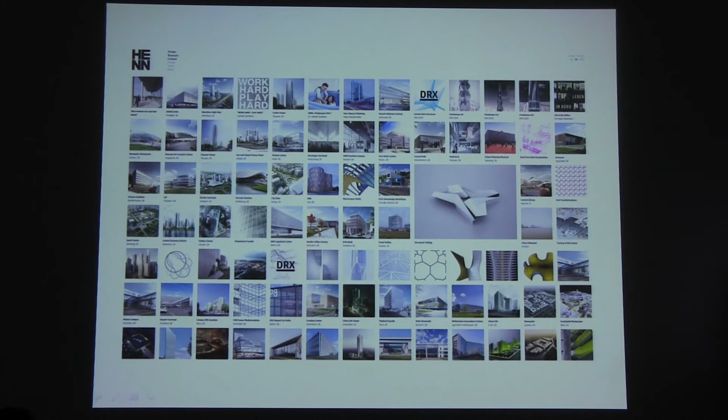I would like to illustrate and talk about that dynamic at the hand of three projects, very different in scale and in type. First one is the Porsche Pavilion. Second one is an innovation center for Merck in Darmstadt, not too far away from here. And the last project is the Haikou Tower in China.

I would like to start with Porsche and the building typology of a pavilion, which in itself is something in between a building and an experiment. It's something that is usually temporary. This one was supposed to last longer, but a great vehicle to test things that you usually don't get built.

The context in this case was the brand. Everyone knows Porsche. If you're somehow interested in cars, or if you're obsessed with design, then the 911 is kind of like the incarnation of your desire. And when we were commissioned to do this pavilion, we really examined and tried to understand what the core of that brand is.

In the brief, we were confronted with these kind of clouds of words that would mean something, but in the end also don't mean anything. You have these contrastive pairs of tradition and innovation, exclusivity, social acceptance, performance, design, functionality. It all means everything and nothing at the same time.

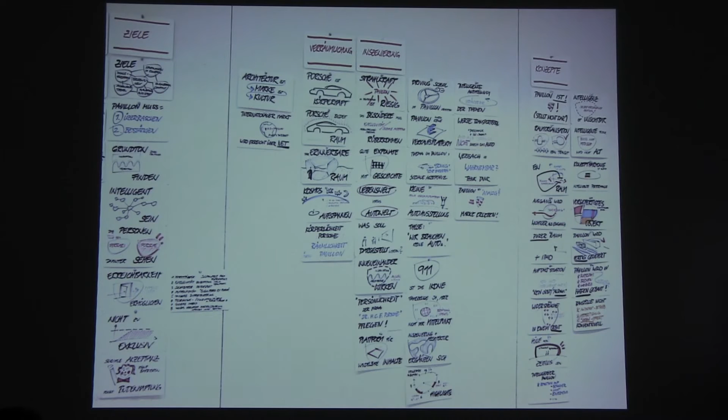They basically, in a one-to-one interview or conversation with someone else, visualize and extract the information and then put them together. So each bit of information is on one of these cards, and they map those cards out and try to filter out the main messages that we then try to translate into more abstract terms in order to inform the design process.

So in this case, we collaged images and references together from architecture, from the art world, to visualize and get an understanding of these terms.

So the first one was the idea of structure and body, where Porsche as the chassis is something that is surface-based. It's not something that has a surface and then something that holds it up, but it works like a body. The idea of light, that the pavilion should somehow negotiate between the daylight, and on the inside there was supposed to be media presentation, so it's basically like a dark room.

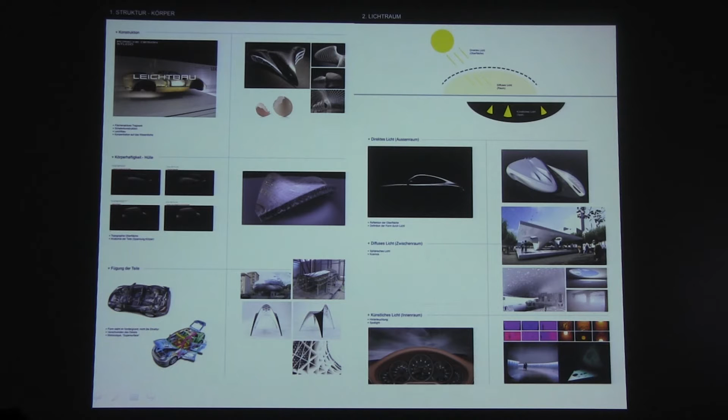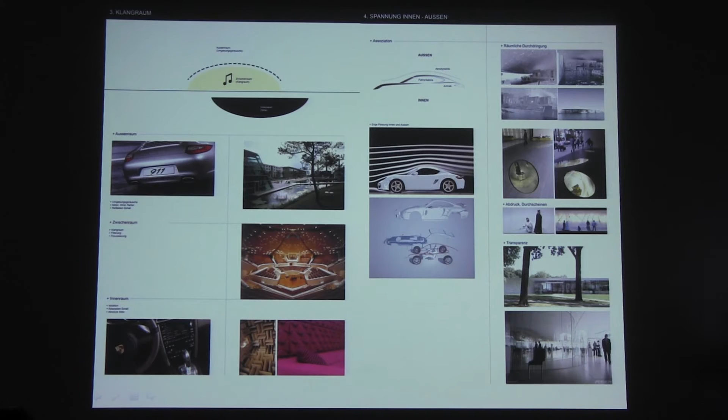So how do you deal with that? The idea of sound, the threshold or the tension between inside and outside. These were all, you could call them mood boards as well - maybe first attempts to understand how to translate what we first saw as these kind of brand words into something that could help us develop a design from it.

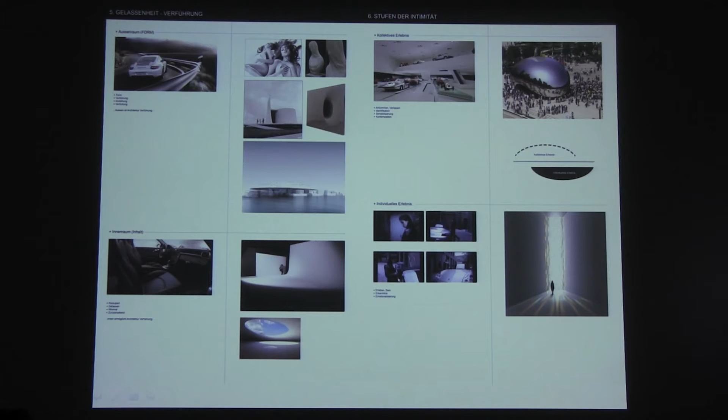Here this idea of seduction, also that you want to somehow attract people. The idea or question of intimacy - should it be a collective experience, or do you want to be on your own when you experience this car?

The location is in Wolfsburg, in the Volkswagen Autostadt, and the site was right next to the water. So there was also the idea to maybe integrate that somehow.

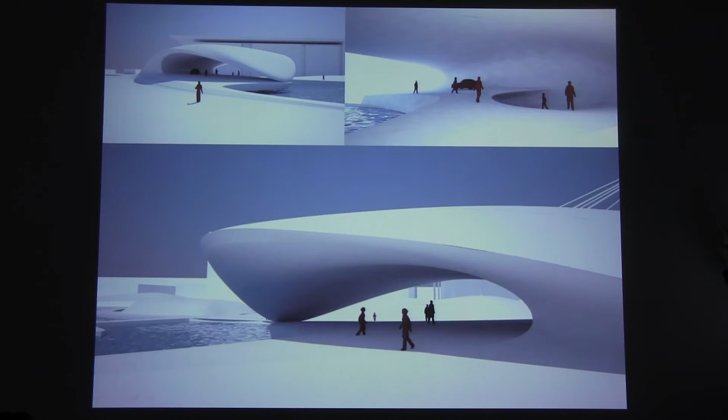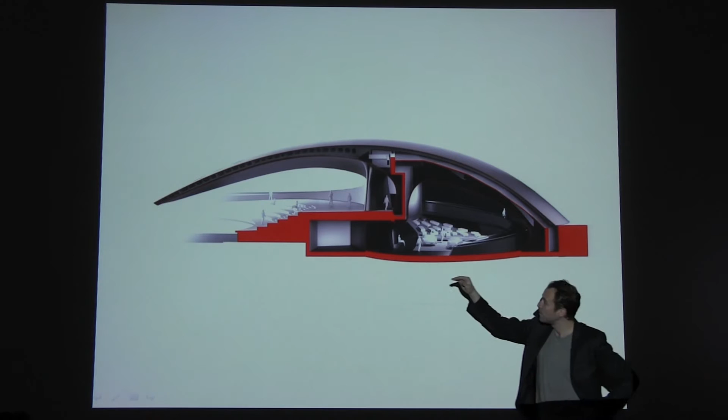We started to play with this idea of exterior space becoming interior space. You can see kind of like an opening or a hint of an opening on the top right. The idea was that the actual exhibition space could be basically buried in the ground, and that this kind of in-between space would then lead you almost in this processional way up to that moment.

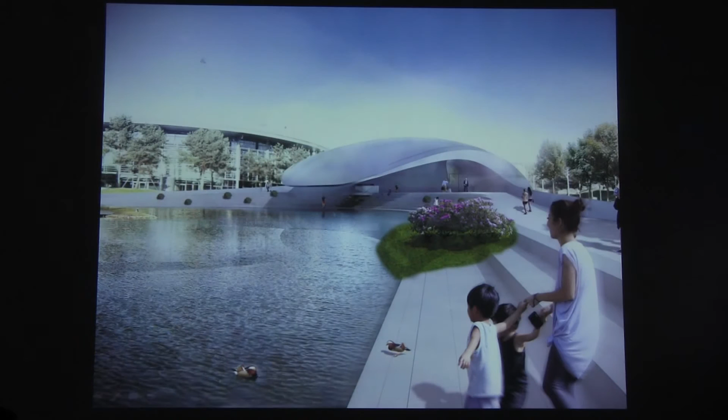And then here, the first or more concrete images of what we imagined this thing to look like.

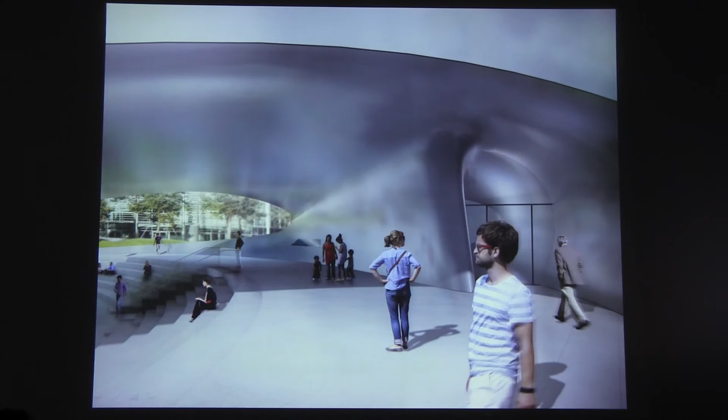And that was all good. So we were kind of happy, Porsche was happy, the brand dudes were all applauding, Mr. Müller, the CEO, liked it. Also all the Porsche designers who we went back and forth with, they were actually quite amazing. We learned so much about curves from them, as I've never learned from anyone else, like how to accelerate and decelerate a proper curve. Any Maya seminar at Columbia was just bullshit compared to that.

So that was kind of like the image that was out there. But the problem was now we had absolutely no idea of how to build it.

So we said, okay, let's reverse the game, and we launched a competition amongst some structural engineers, some quite well-known ones: Arup, Buro Happold, Sobek, Knippers, and others.

And they all came in and presented to us different ways of basically formalizing this now as a structure, and also of formalizing it in terms of material. So there was the whole range from a concrete structure to a grid shell, a wood shell, then here kind of a steel structure.

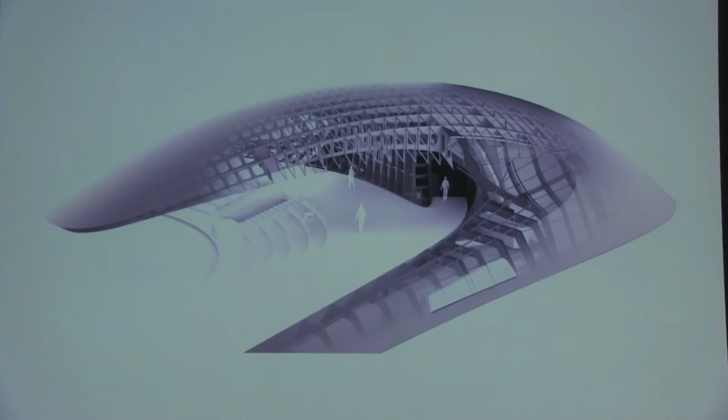But anyways, the choice was made, so he was our man, and we then started thinking of other ways of doing it, and we came across a company that usually builds ships. It's called Centraalstaal, and they have done big sculptures with people like Anish Kapoor. One of our colleagues had already worked with them on another project in Abu Dhabi.

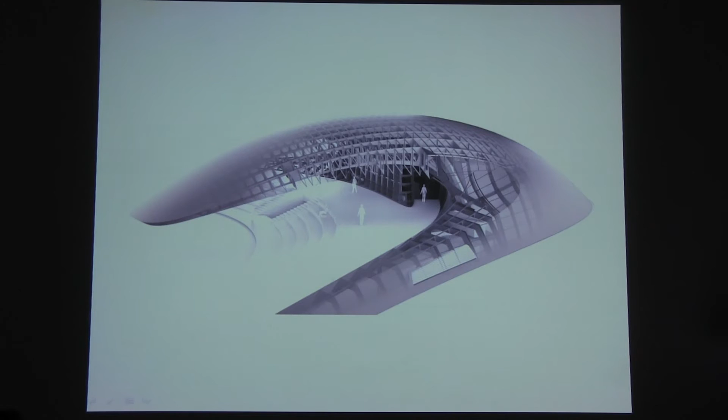We started approaching them, and they said, absolutely no problem, we can do this for you. So we decided to go for this option, and we decided to do a monocoque structure, which was very interesting or intriguing for us, because it combined the spatial enclosure with the structure. So basically what you can see here, the ribs and the surface that encloses it is one force-active whole.

And they proposed: okay, we can build this in sections in our shipyard in Stralsund, and then basically ship it to your site and assemble it, and that's the end of the story.

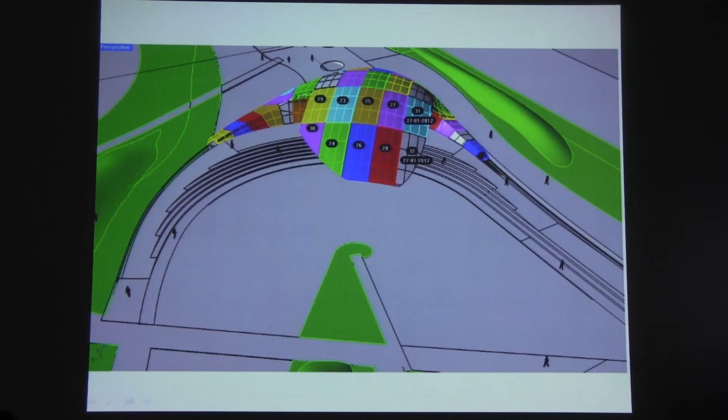Maybe I have to mention that what was kind of difficult is that the construction, we only had one year from the design to the realization of the building to the opening date. And the Autostadt was in full action, so the construction site could only happen at night. The main part was basically over winter, so you can imagine the poor construction workers working their nights at crazy temperatures with, I don't know, super high speed.

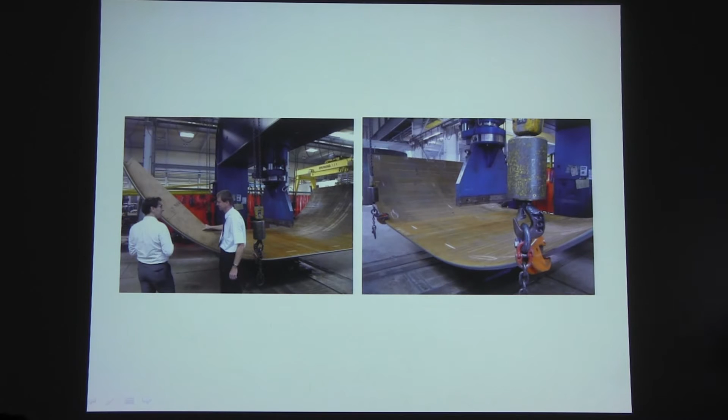Good, so this is the factory where you can see the big sheets of, it was actually stainless steel, and these big tools which basically pressed those sheets into shape.

We built mock-ups in the first place to take the Porsche people there and make sure that the finish of the surface was going to be good enough.

And it was quite amazing. I mean, these surfaces are double curved, and they only had a tolerance of, I think, 2 millimeters over these pieces that were the size of what you could still put on a truck.

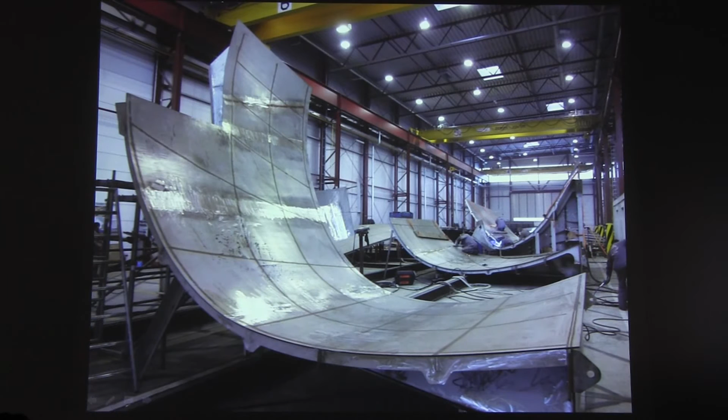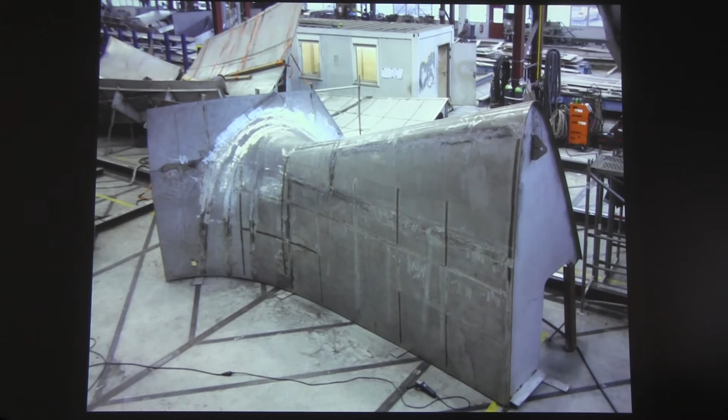And then, after a while, we took over that shipyard, and here you can see this army of pieces and sections that they all welded together. Some of the pieces were kind of easier to make. Others, where the curvature was more extreme, were incredibly difficult, and they had to sometimes redo them multiple times in order to get it right.

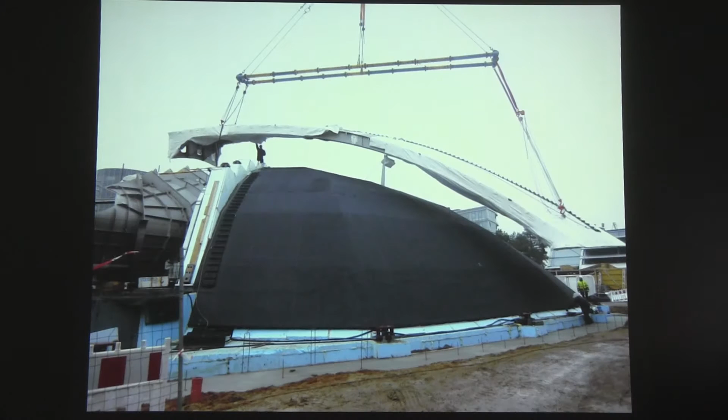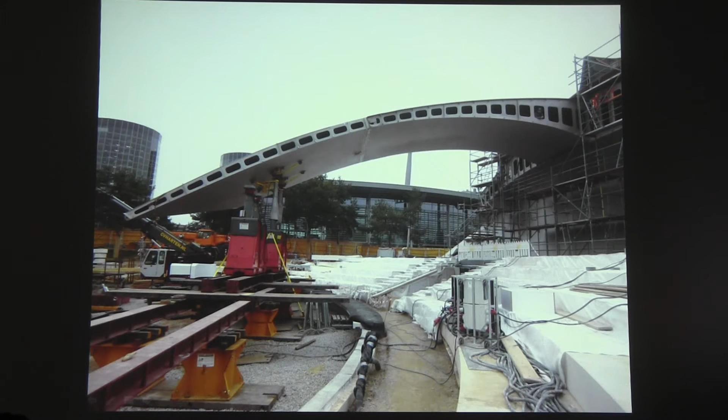So here you see the assembly then on site. This is one of the sections. This black thing underneath is basically the already insulated concrete shell that houses the interior. And here were the first pieces that were attached, the first cantilevering pieces that were attached to the main body.

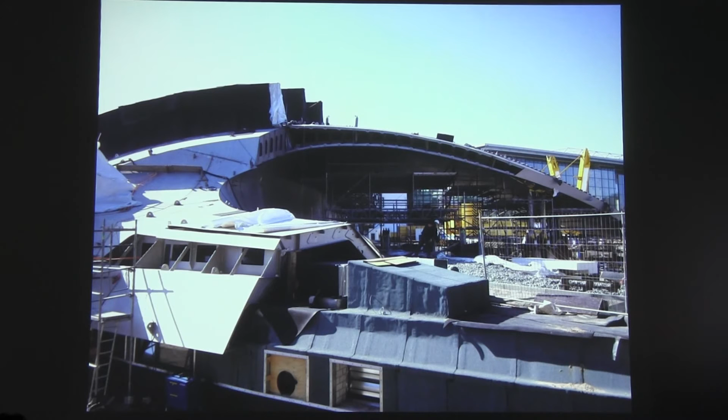And you have to imagine that when a new section was brought into place, they had to basically weld it from the outside and from the inside. These in-between spaces, over there they were still quite large, but in the front part they were really narrow. So they had to fly in these climber guys from Austria, welding specialists who would make their way all the way into that tip to close it off from the inside. Thank God everything went well and they didn't burn themselves.

And these are images of the finished structure, which was the very first building that I ever did and finished in my whole life. The biggest surprise was to see something in real scale that you usually only have on your computer. That moment when you see your first building realized is so amazing, because you're overwhelmed by the fact that it's really there. In this case, I was quite amazed that it really looked like the 3D model. It was one-to-one, the same thing.

And what was interesting was to see how the material kind of behaved and came across and appeared. It was basically stainless steel, and then they brushed it with stainless steel little balls. That's what they threw at it after they welded all the pieces together.

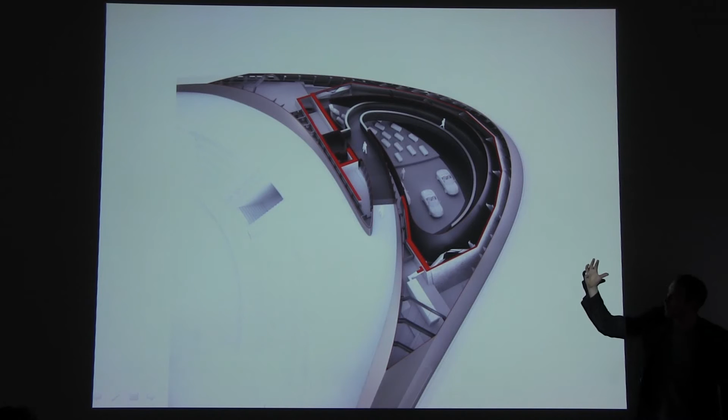This is the entrance to the exhibition space, and here you can basically see how it works. You walk in through that bridge, which then spirals down and takes you out again. It's organized in a loop. On the inside you see this swarm of cars dropping down from the ceiling, telling the story from their oldest model to the latest one, the whole design evolution of the 911. That's a shot of the interior.

Initially we tried to do a pavilion without a car, but in the end they won. They said we have to have a car there because people want to sit in that stupid thing. So there was no way around it. And these are photographs from the outside.

The second project is very different in kind and also in terms of its context. It's for the oldest pharmaceutical company in the world, Merck. In 2018, I think they're celebrating their 350th birthday. And they have their main production site—I wouldn't necessarily call it headquarters—in Darmstadt, not too far away from here. This is where they have their chemistry and also their pharmaceutical production and brand.

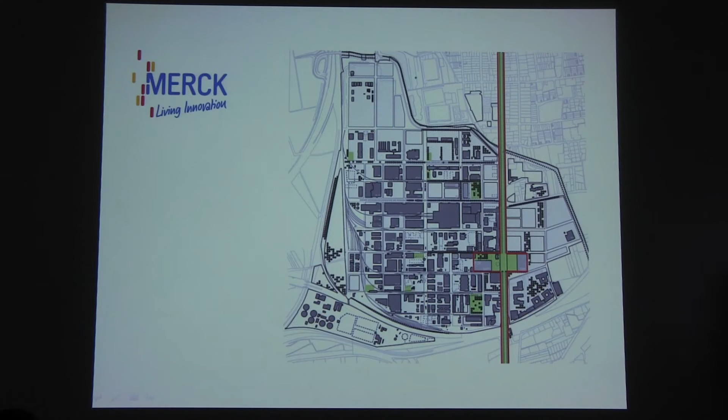They decided, no, we want to have a building for our people to collaborate and to innovate across the disciplines. Their biggest problem is that they have so many people, but they have no idea what the other field or branch is doing. So they wanted a building where they can come together in smaller project groups and sort of infiltrate and infect each other.

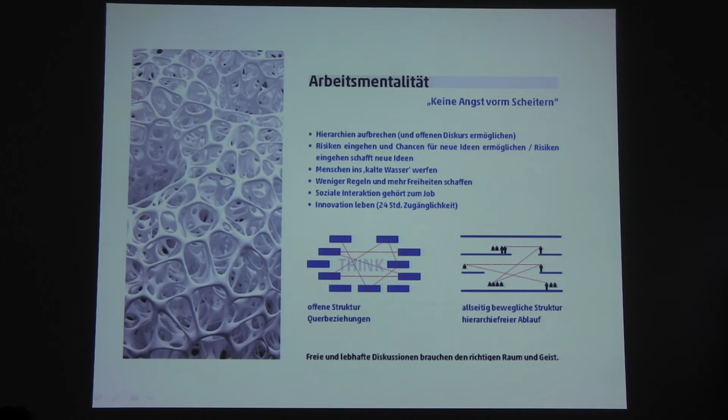Again, here we had our programming team work very close with the client and with the users, and they basically filtered out these main statements: that they wanted to collaborate, they wanted to be physically connected across the disciplines. Communication was one of the buzzwords that kept reoccurring, but also a place that would somehow suggest that it's okay to make mistakes, to fail. So something that is the opposite of a corporate headquarters, more something where you can experiment, where you feel somehow triggered and engaged.

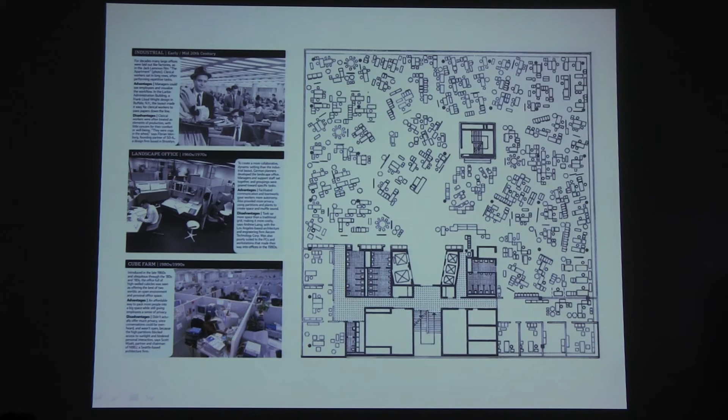Work was passed on. In the 1960s and 70s, the so-called Bürolandschaft was invented. This is actually a drawing of a building by my grandfather, the Osram headquarters in Munich. He was the one to first introduce the Bürolandschaft in Germany. It looks kind of as if he was tripping on some kind of drug, but it was actually quite innovative for that time.

This is an interior shot of the office. The building still exists in Munich, it's now listed. This kind of went on then to the cubicles, where you wanted to combine this openness with a sense of privacy.

In the 2000s, companies like Google and others brought in the whole fun factor, this idea that it has to be more fun to be at work than to be at home with your family or with your friends, which psychologically and also socially I find very, very difficult.

And then, most recently, the trend towards this kind of collaborative approach. Even though there's a long history of office buildings in our own office, we basically invited people to talk about this whole issue.

This is something we have called the Henn Academy, where we bring in people from the outside to talk about certain topics, in this case officing. It was a series of lectures that was quite enlightening, I would say, for us.

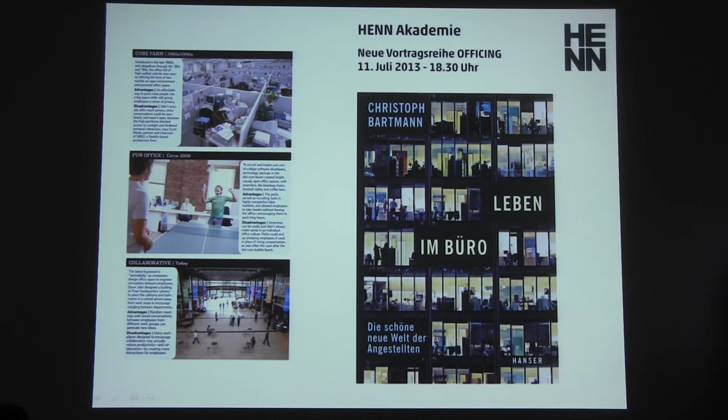The first one was by Christoph Bartmann. He's running the Goethe Institute in New York, about the life in the office. Quite an ironic take on all these kind of motivation tricks that you have these days.

But then also clients of ours talking from their perspective, what are the needs and the requirements of their people. This is Hypo and BMW.

And we invited Carmen Losmann, a filmmaker, the movie Work Hard, Play Hard. I don't know if you've seen that. It's quite shocking, I have to say.

And Professor Nassehi was in the office about two weeks ago to talk about what we're actually doing after work. And the question is, work these days, is it ever over? No?

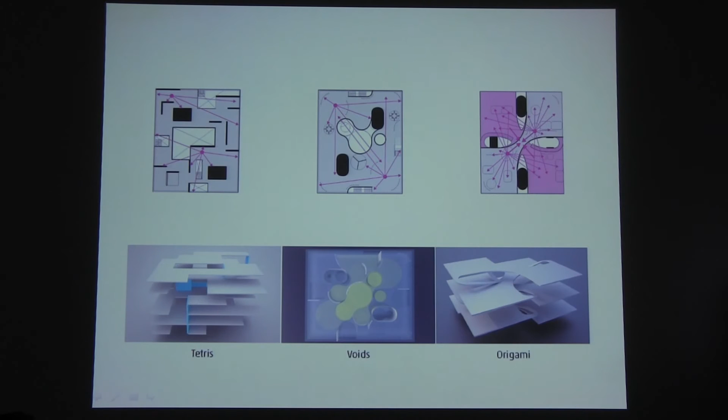This was a very early study model that still serves for us as the main idea of that building, which is currently in the planning.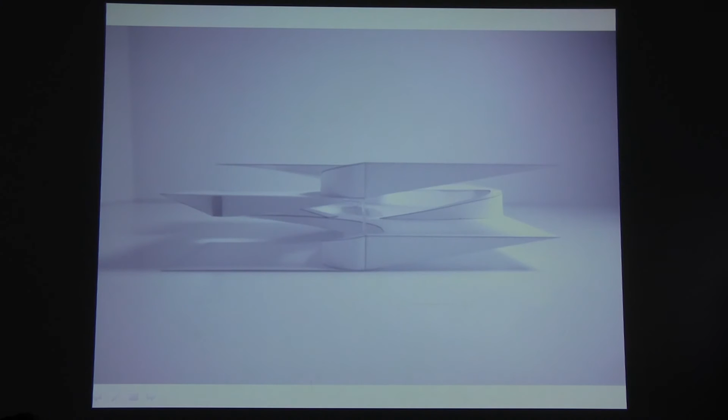You basically have, it's geometrically very simple. You always have these two project platforms that are connected by a bridge, and then they just kind of rotate, and they're connected through these ramps or through these staircases.

What was nice about this structure is that this was also an input from our programming team, who said we have this gradient of program requirements. Some of the programs had to be more private, and some had to be more open and public. I think this is something we learned, that you don't want to communicate all the time, but sometimes you want to sit down, focus and concentrate.

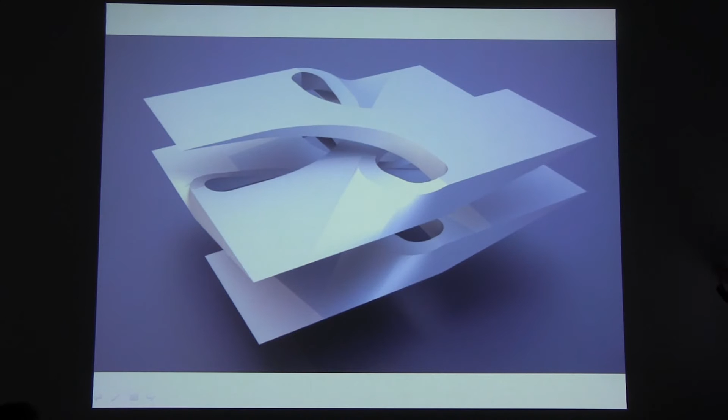So these kind of bone-like things almost. Now at the very end, you were most private, and then there was this gradient, or this climax in the center where things were most public.

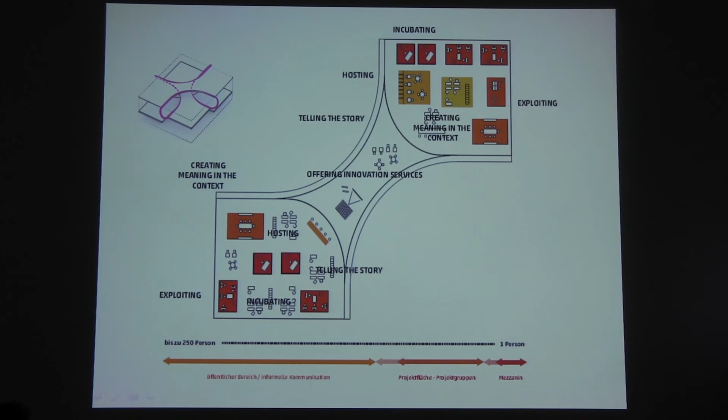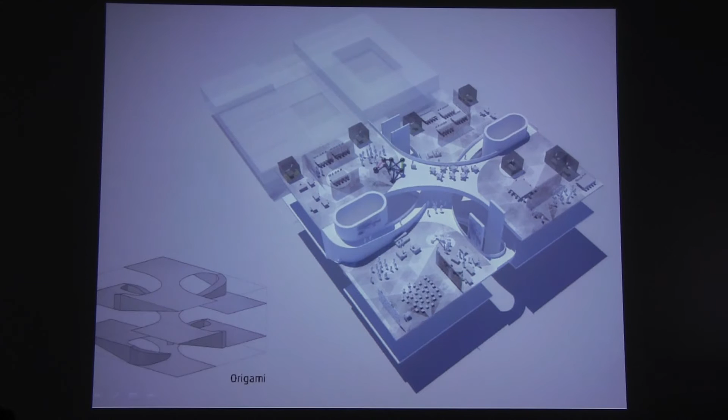This is a series of programs that we had to place along this floor plate. Towards the center is where all the communication spaces and presentation areas happen, and towards the periphery you have smaller tables and work groups where people can concentrate and hide away.

These are first renderings. We're basically standing in the very corner. It's always like a double height space, and we're overlooking a project space in front of us, then the bridge that connects over to the other side. Up here is basically two more project spaces that are connected again via that bridge.

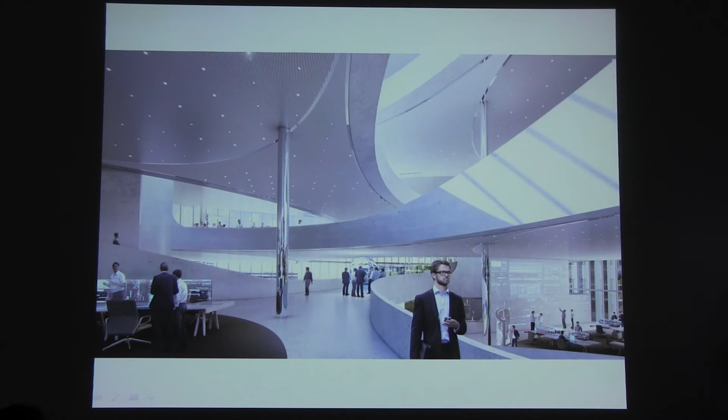In the beginning we were a little bit scared that the client, Merck, would be shocked, but they really loved this concept, and I think bought into this idea that it's a very multi-layered space that could come into being here.

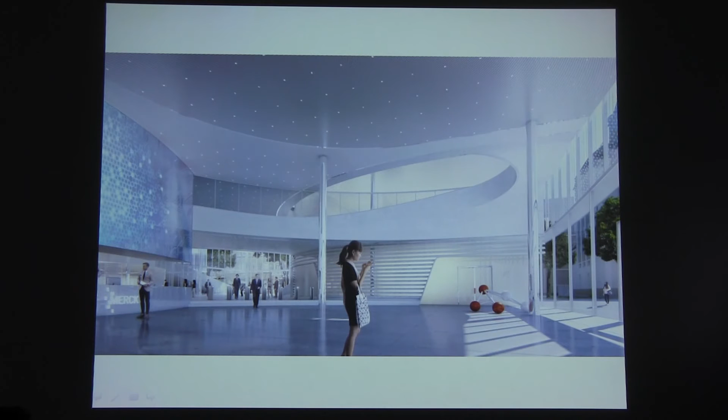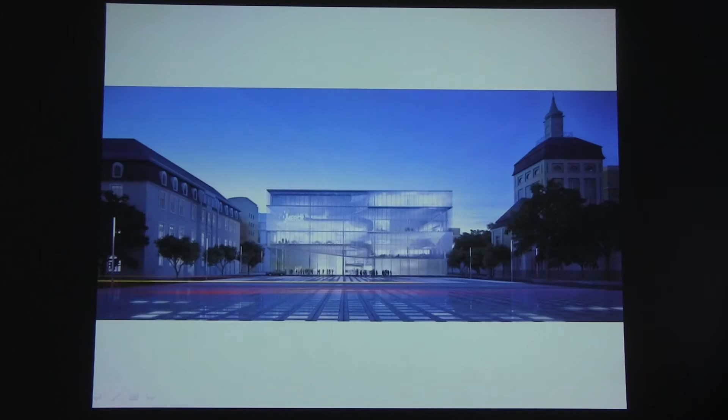This would be the entrance at the bottom, where when you walk into the building, you have this kind of awareness - you cannot see what's happening, but you can somehow sense and feel that something is going on. This is a view from the outside, from Frankfurter Straße.

Good, let's go to China - the Haikou Tower.

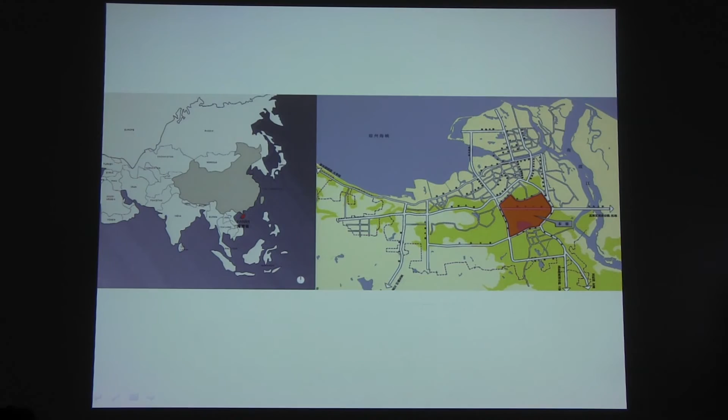Here you can see the site. The client was Hainan Airlines, and this was the former airport - this is the former runway you can see here. They basically turned the airport into the new CBD, and Hainan Airlines owns pretty much all of it.

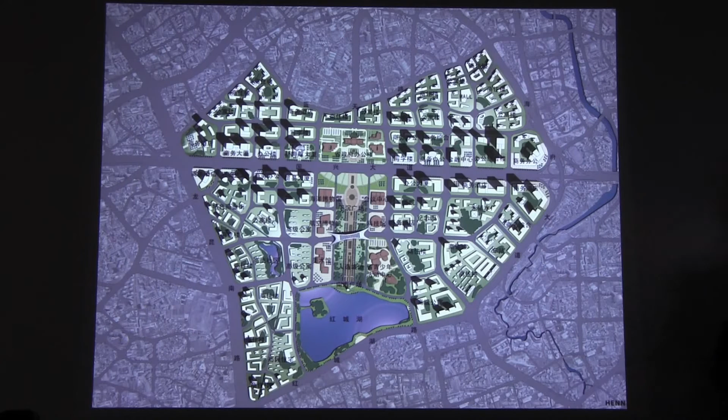This is what it looks like when we went there to see the site. Like many times in many cases, there's absolutely no context. The only building that was there already was their headquarters - this beautiful structure that you can see here.

We went to see them and were a little surprised, so we asked what's up with them, and we found out that they have a big boss in China - you always have a big boss - who is a big Buddhist. Buddhism was also something very present and important for the local culture there. This is a statue at the very south of the island.

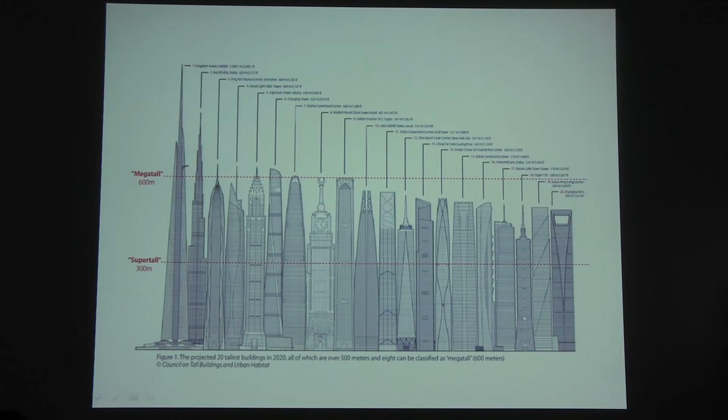In any case, we started to focus on the challenge of doing a 450-meter high tower, and we started looking into what is out there. 450 meters technically is something between super tall and mega tall, so that sounded really interesting.

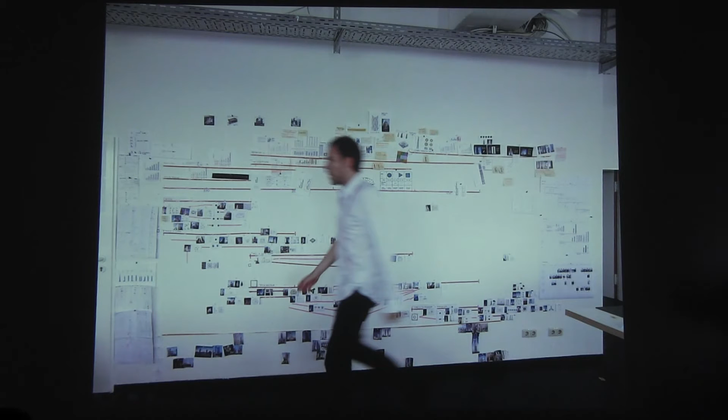What we basically tried to do is put together a matrix of existing buildings, and we tried to study them according to their structure, their program relationships, and in terms of their circulation, and tried to make sense out of all of that for us. This here is a diagram where you can see different structural systems according to different heights. You can see everything below 200-300 meters is kind of an easy undertaking - above 300 is where it starts to get tricky.

That little thing up there is where the wind also starts to play a big role. So it's not just about the vertical loads, but mainly the horizontal loads that start to become the problem.

And we studied that in relation to other systems that you can find in a skyscraper. Circulation, the core, being also quite an important one - it takes up more than 50% of the area. And also the way different programs were organized. Usually a tower is not just a single or mono use, but you usually have offices combined with residential, or hotel, or commercial facilities.

So in this diagram, we are basically relating - you can also see the little icons for the circulation system, so the central core versus split core versus eccentric core, and then in relation to the different structural systems, form outrigger versus perimeter structure.

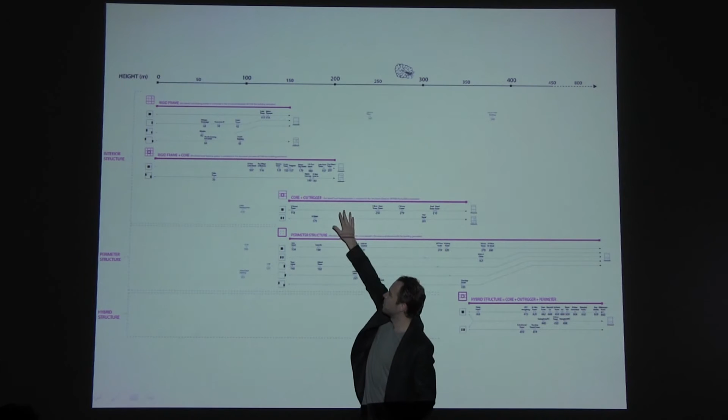And we started to read patterns now in those structures in relation to circulation systems and program arrangements. And that helped us a lot to understand how these machines - you can almost call them machines because everything is optimized and maxed out - how they would work and how they would operate, and how we could then use that creatively or actively to come up with a design on our end.

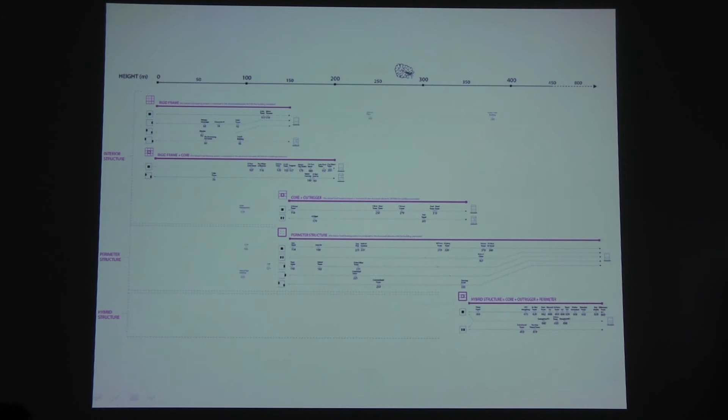With our first ideas, we then went to the London office of Arup and had a workshop. And that was almost like the most important day, I would say, in the whole competition. Because we were just sitting around a table, and the amazing thing there is that you just have people walking by. So there is the elevator guy, and then there comes the MEP guy, and then there comes the structural guy. This was the moment where the economics guy walked in, and he said, 'Okay guys, just tell me what are the two programs that you have.'

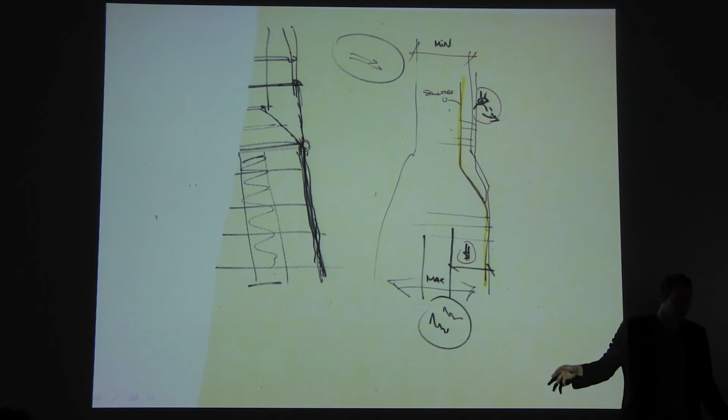And we said we have a hotel at the top, and we have offices at the bottom. And he said, 'Okay, that's easy. You have to max out your square meters because you can rent them.' And at the top where you have the hotel, it's all about the views. So you don't want to have any kind of structure in front of your face.

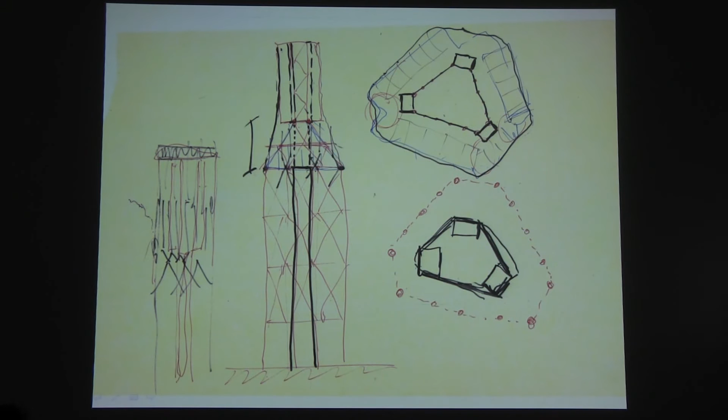And even though it was just like a sketch, or a very early moment, all of these different opinions kind of coincided and almost became the key diagram of the final tower. So you can see here on the left the office chunk at the bottom, hotel at the top.

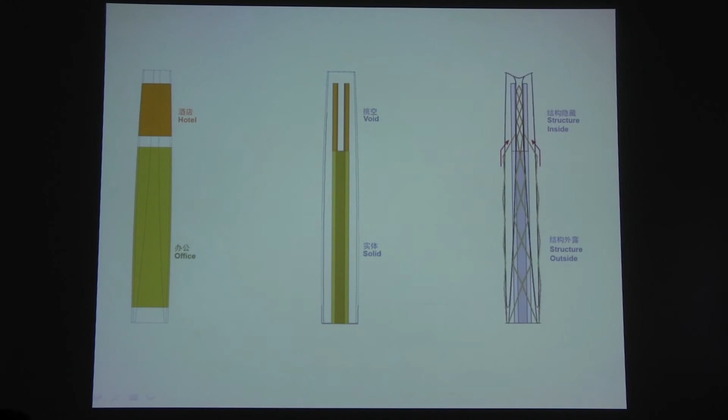So we decided to do for the lower part a solid core, which then at the top split into two and created a central atrium or a central void. And the secondary structure, this kind of diagrid, would, at the moment where the program flipped from office to the hotel, basically fold inwards, so that it would become experienceable from the hotel void, but that you would have free views to the outside.

The vertical forces were - so this is kind of like a simple diagram of how the form was generated. It's kind of like a square, and then as you should try to taper towards the tip for aerodynamic reasons, we basically pushed in the four corners and then had a series of 8 mega columns run along these describing curves now of the tower.

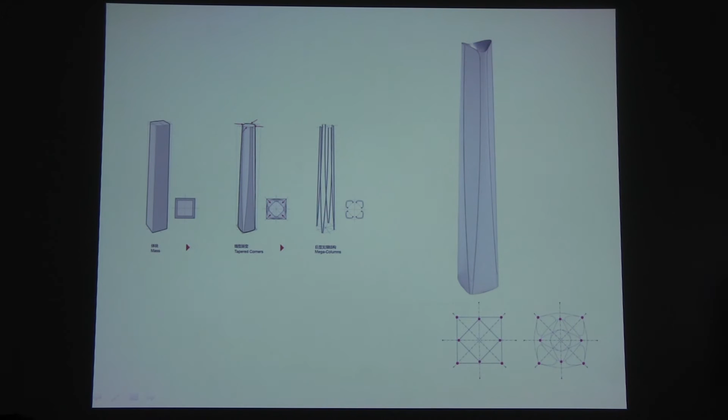And what was interesting then when we played around with this - it was still like a simple, very conceptual Rhino model - and we turned it into the top view, one of our colleagues from China started to smile and he said, 'It looks like a lotus flower.'

And we said, 'Yeah, that's right, that's true.' And I said, 'That's awesome, we have our story all set.' So from that moment on, the tower was called the Lotus Tower.

I'm kind of joking, but in China, this is almost like 50% of it - you can do a really intelligent tower, but no one's going to buy it if you don't have a story to sell it. And it's probably like with you, when you present to Johann at the end of the year, you somehow have to seduce him and build up some kind of a climax.

So this was the tower as it kind of came out.

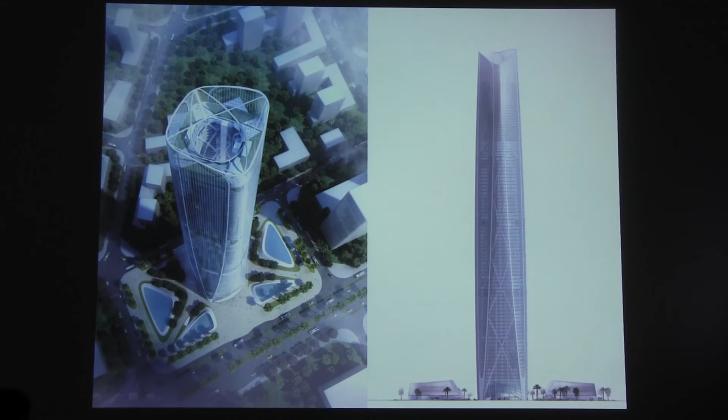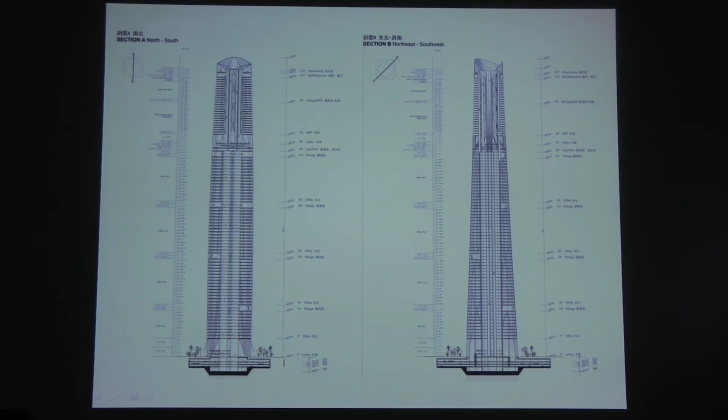In China, you always have to be on time, so they always come in between 8:45 and 9. So the biggest challenge is to dissect these flows of people and lead them to the right elevators. You have this on 3 or 4 levels where you try to take those flows apart and bring the people to their specific elevators.

As you see down here, the tower basically sits on those 8 mega columns that come together in the corners, and also the big diagrid that then hits those corners. So this is basically completely column-free. I think the distance is 55 meters, completely column-free space.

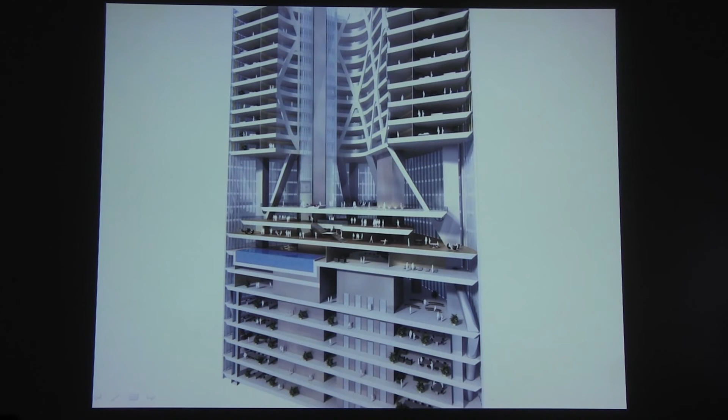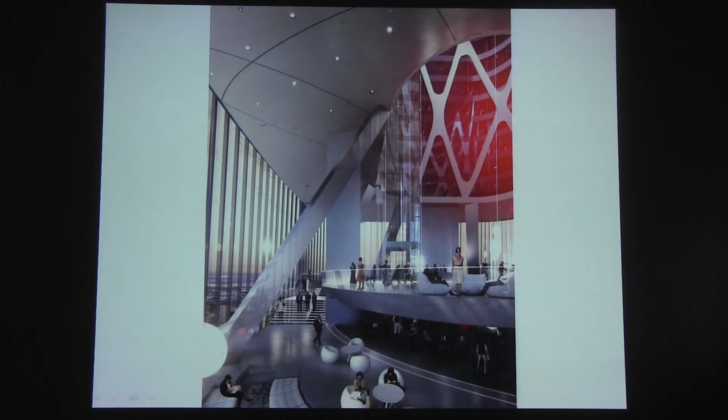Here you can see that the central core then becomes a central void, and this is at the very tip. Also something that we try to do: usually you have MEP sitting on top of a tower, so we try to keep that all open so that natural daylight could fall into that void.

So we submitted this competition, and that's also something in China that is usually very different from here. In Europe, you have a proper jury and you get a proper report. Over there, everything is kind of mysterious. You don't hear for a long time, and then they come back with some kind of news.

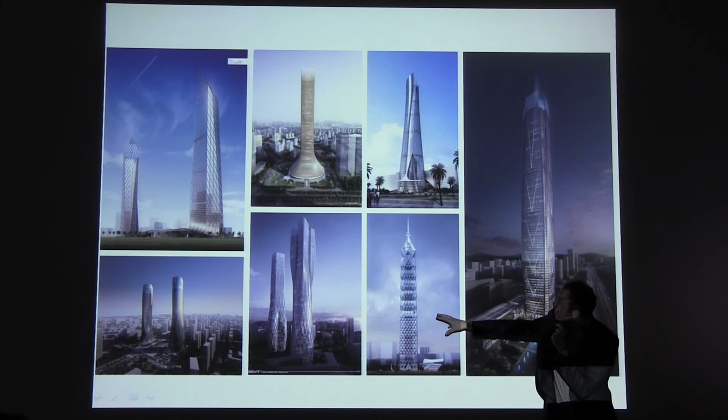These were the other competitors, by the way, or some of them. This was Wilkinson Eyre, Zaha, and RJ and some others. They basically shortlisted, after a public voting which I think was probably faked, these guys - Wilkinson Eyre and us - to go into the second round of the competition.

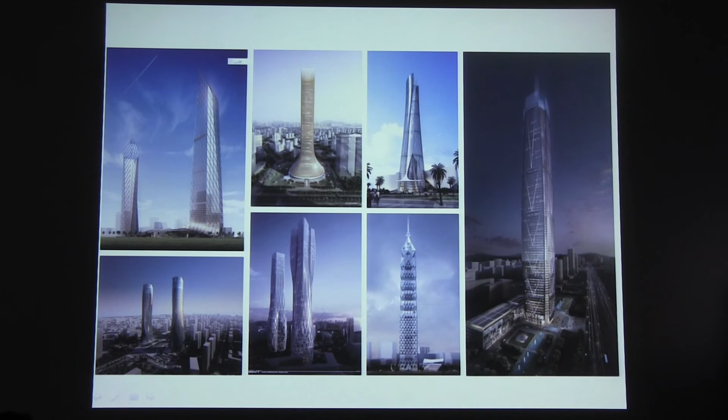And they told us, okay, it's not just the second round to refine the design, but instead of 1 tower, we want to have 10 towers. So it was okay, why not?

And not only 10 towers, but there was this hint for the master plan that it should somehow relate to the Buddha hand. We were a bit speechless and didn't really know what to do with that. In that sense, our Chinese colleagues were really important to mediate and explain to us what was going on in their minds.

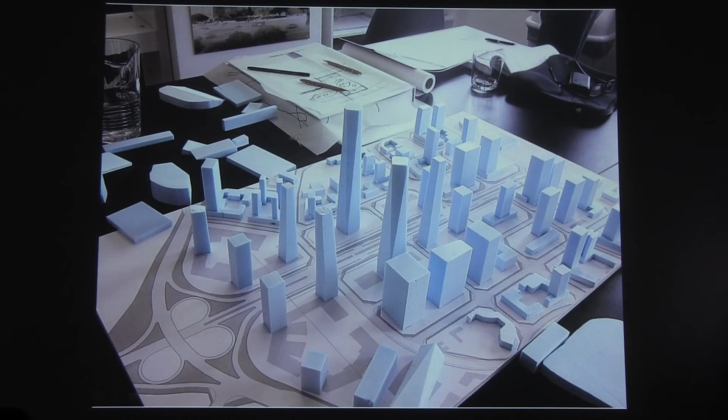Again, maybe we looked at it more from the architecture side, but always had this guy in the back of our minds. We ended up with a pretty simple proposal, where this was the big guy, the one that was already designed. So we said, okay, 2 hands and 2 middle fingers - they are the big guys - and then everything else becomes a bit shorter.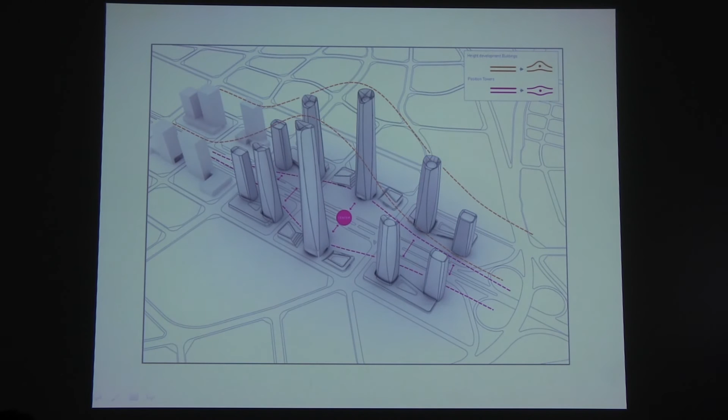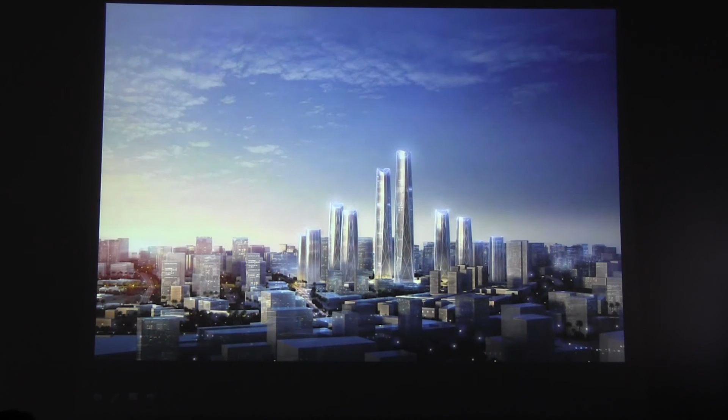And where you have the highest towers, the distance is the largest. And as you go shorter, they come closer to each other. These were then renderings for that second phase of the competition. And it was kind of interesting.

Then along the way, there were also talks again with people who would really understand that culture very well. Something that I, for example, didn't know about these Buddha statues is that the head is usually overdimensional. If you see it in perfect elevation, the head is too large for the rest of the body. But this is because these statues are usually very, very tall, so that when people see them in perspective, the size of the head seems just right.

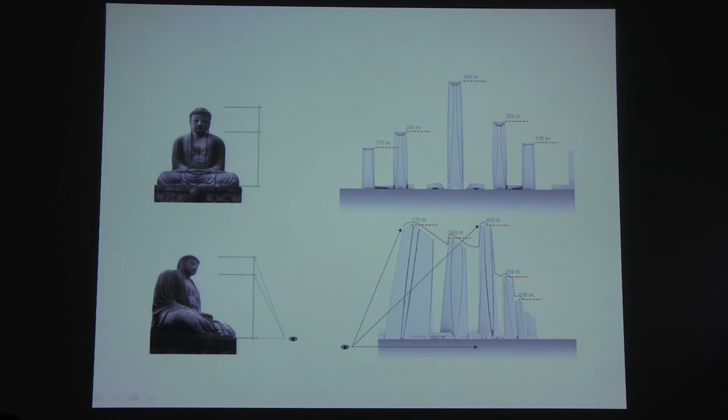So these were little subtleties that all went into the massing and the refinement of this master plan, and it helped us a lot when we presented it and explained it to the client, to somehow help them understand.

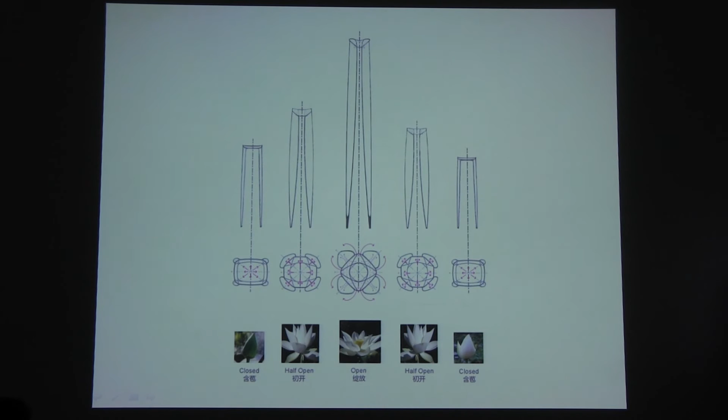The problem was that we only had about 6 weeks of time, and we had a rough massing and the heights of the towers defined, but we now had to design 10 towers, and that's something that's kind of impossible. So we said, okay, let's have our main tower almost like the father, and then the smaller ones follow a similar logic, but become more and more regular.

They basically create the link or transition to the rest of the city. That's an elevation of 5 of the towers, and a view of that former runway, which is now going to be the central boulevard of the city of Haikou. That photograph you saw before, where there's just a big piece of open land, is probably taken from here somewhere.

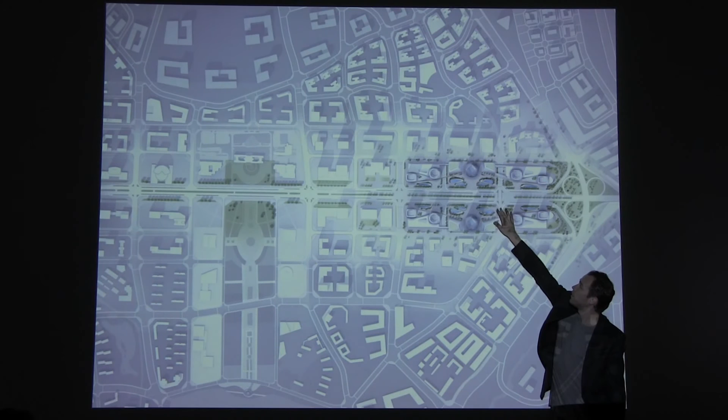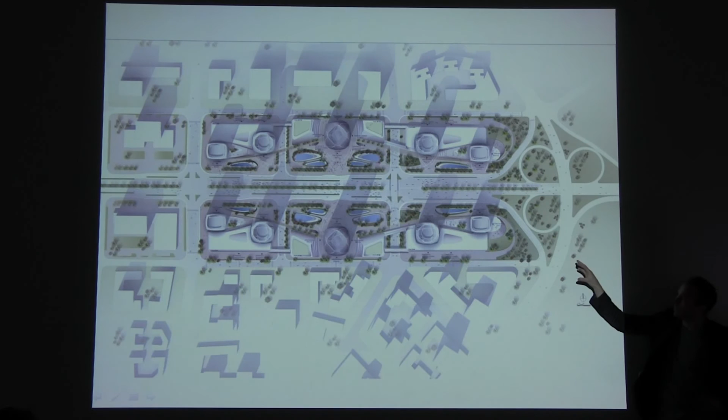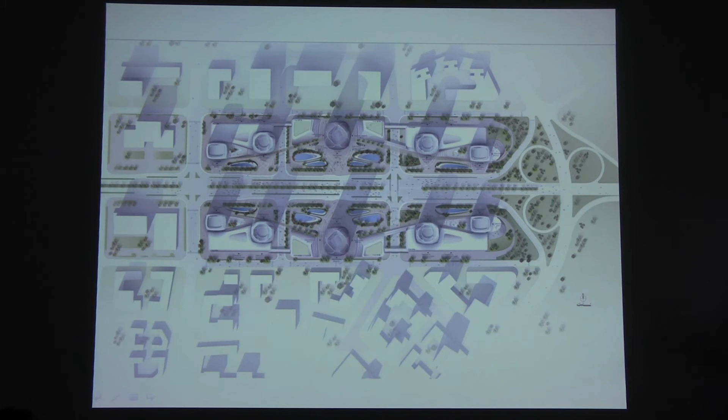There's basically this series now of towers, and they are all interconnected above ground and below ground by these kind of undulating commercial plinth buildings. In front of the buildings there's landscape, which is usually of great importance.

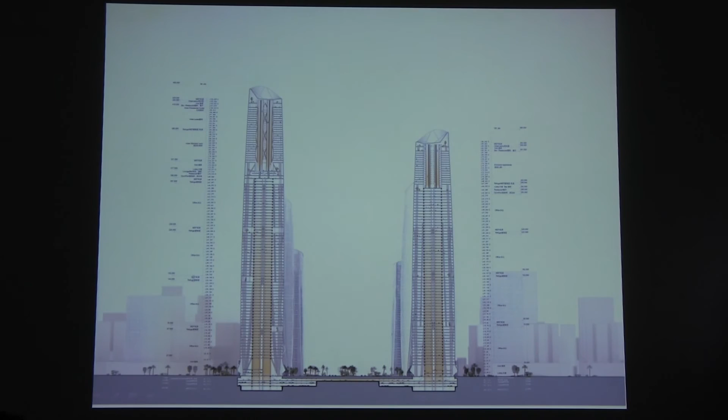In the sections you can see how they almost form a city in themselves. You can basically move around from one to the other without ever going outside. I don't know if that's good or bad. We're even connected underneath the streets.

We were lucky enough to win the competition, and then months later we went to Haikou to the client's office for a discussion about the status of the planning. We walked into his room, and there was a big model of the city, and we always thought, okay, this is probably like a marketing gag for this one Haikou tower to happen. But they actually had built the 10 towers in the model of the city, so that master plan was actually approved and is in full effect.

We have now just finished design development of the big tower, and that's supposed to start construction early next year. Just recently, about a month ago, we won 2 other towers, the ring finger and the little finger, and we're starting schematic design for those.

So maybe this is an example where it's not so much the context that influences the design, but maybe where the design starts to influence the context, or actually to define the context. It's interesting to see, and I hope I could somehow show that in my lectures, that there's always this dynamic in between, and I think it's important that during a design process you're open to all of these forces that are at play. Thank you very much.

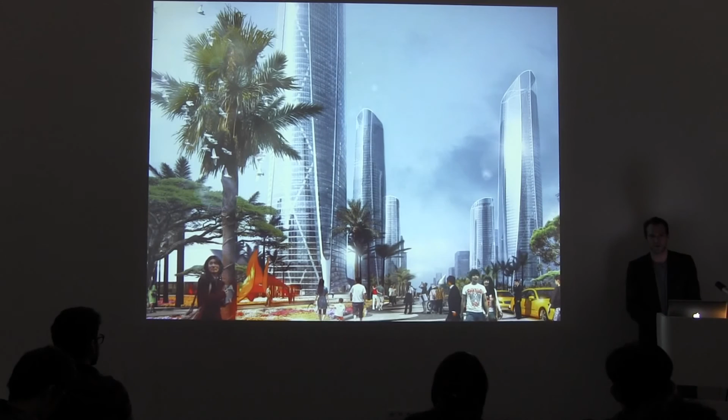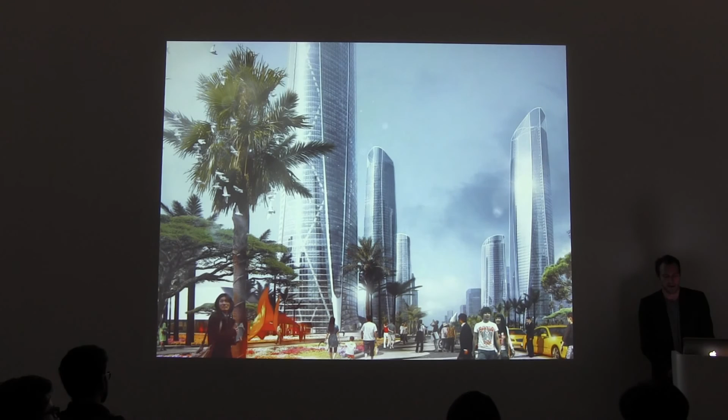I'm totally with you, this has something also very scary to it, and there's always a very thin line. I think it's kind of like the two things now between a master plan—especially on these gigantic projects, you have to make these very strong statements. I think if it's then at some point designed as a building, it will come out, I think, very differently, and somehow provide a sense of diversity within the bigger whole.

I don't have another question. I really appreciate the lecture, I thought it was great work. Also the honesty of basically also saying research as far as it can happen on a project basis.

Well, here are some examples. I think it also touches in a small way on conversations that we have in a very different, academic setting, about what the relationship is between formal considerations in a project, or design development, and on the other hand a speculation on language—which I suppose this one is too, it's just that you approach it with far more experience and realization.

So you set up, to make the following observations, for instance in the first Monocoque Pavilion you generate a beautiful, intriguing shell-like form, but then structure comes in as an ad hoc consideration. You basically consult a series of engineers who agree to go into competition with one another, and then you choose—so it's sort of a post-rationalization of the form on the structural level. So I have a question about that: at what point do you, because you speak about the dynamics between research, context, and design—can you elaborate on observations from these three different projects?

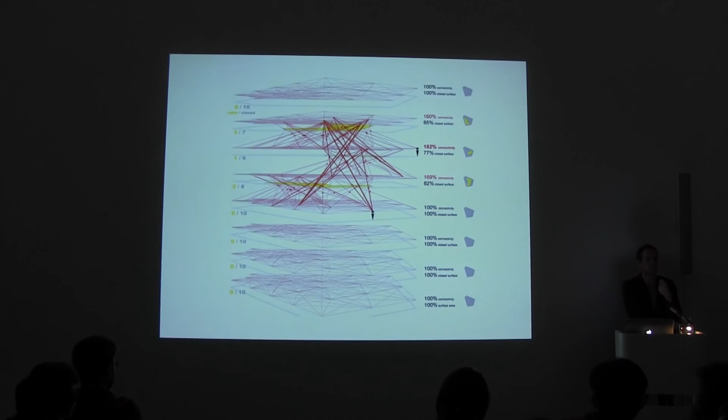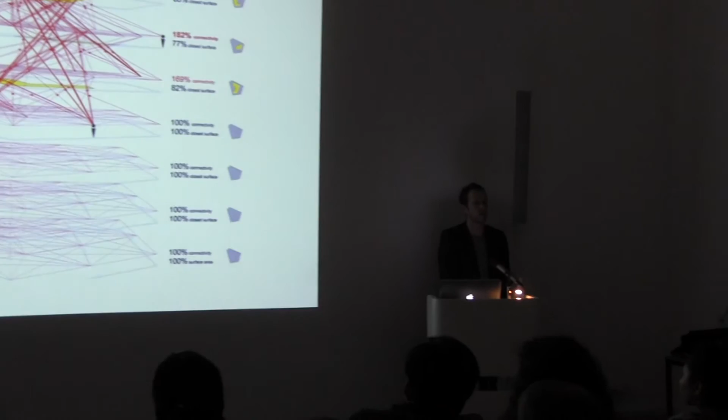These are things that, whether they happen now in processing, I don't want to talk about platforms or tools in that sense. It's more like ways of thinking and dealing with problems and finding methods to solve them. Whether that's visual connectivity, program relationships, or structural feedback when we design a tower, that has a huge impact, I think, on our daily work. We're still trying to get better at it because there's always the time pressure.

This kind of reality hits you. But for example, one of the byproducts of the DRX was also, this is a very tool-heavy undertaking. So we've looked into how to develop tools that can be kind of a digital version of what Frei Otto did with his physical experiments, and how that could feed directly into the design process. That's something that is still in its early phases, but we hope to push that within the office.

And our aim is not to make it to, you know, become like software engineers. For us, it's always that the tool is a means to solve a problem.

It's interesting to see how, I don't know the general feeling here about it. When I went to Columbia, everyone was obsessed with these tools and these possibilities, and people were exercising these tools almost for the sake of it. You'd be very impressed, but always left with the question: what's the point now, or what's the outcome? I think that's quite important, that with all these computational things at hand, which are extremely interesting and compelling and great drivers to keep renewing your design process...